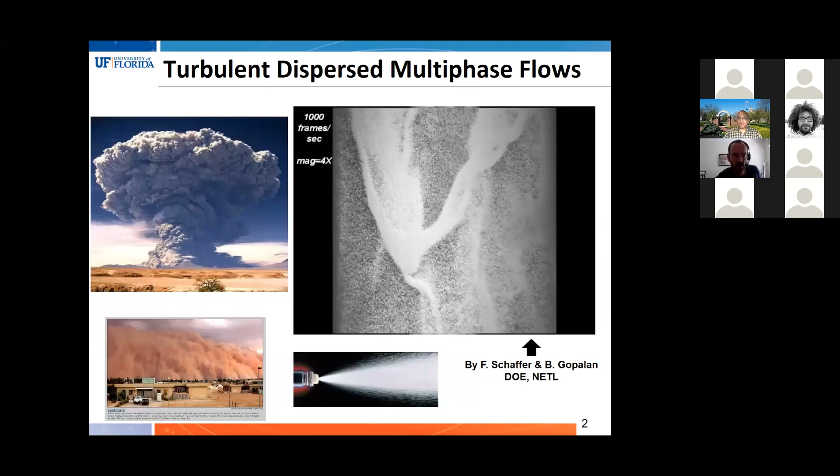First and foremost, in terms of multi-phase flow, which is itself a big area, I'm interested in dispersed multi-phase flow because that's the one I've been working on.

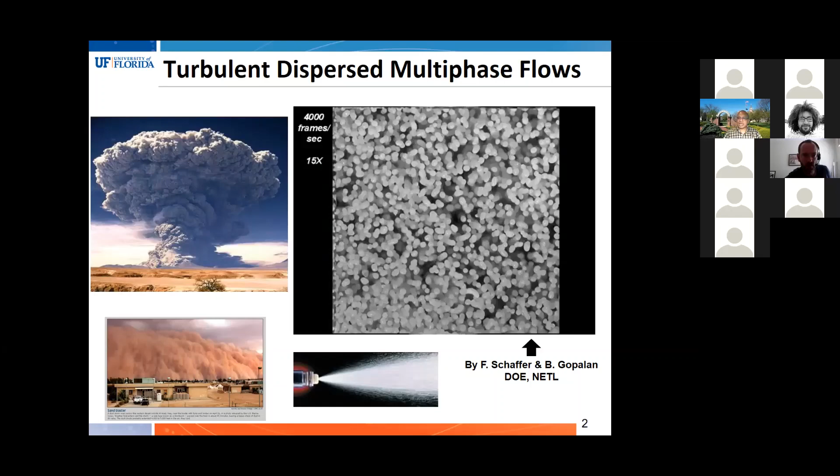This video from NETL is absolutely fabulous because it really gets to the core: you can zoom in and see individual particles, which I call microscale, zoom out and see instabilities, and then go to the full system.

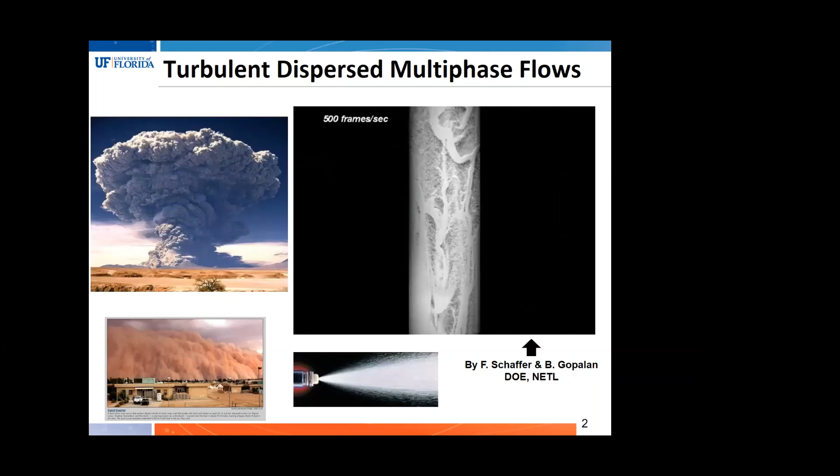On the other hand, the other picture shows some gigantic scales on which multi-phase flow happens. These are the problems that all of us are interested in.

We also know that there are sort of 3 tools people have used. Particle resolved simulations are great because you don't need to make a whole lot of assumptions. I won't say it's completely assumption free—there is some modeling involved, but it's often so well grounded that you can take those governing equations as God-given and compute them.

But the downside, of course, is that it's limited. You can't do a full riser or a full mixing tank with that.

Euler-Lagrange has become a workhorse in certain circles. Again, it involves modeling—mainly that the fluid phase is invariably averaged, because you don't look at the fluid on the scale of the particle; you treat the particles as points. The advantage is you can go up to billions or even tens of billions of particles, track them, and let them collide and do whatnot.

But for a very practical approach—if you want to simulate an entire volcano or sediment migration in a river—you have to resort to some sort of fluid kind of model. Here you average both phases, so more approximations are involved.

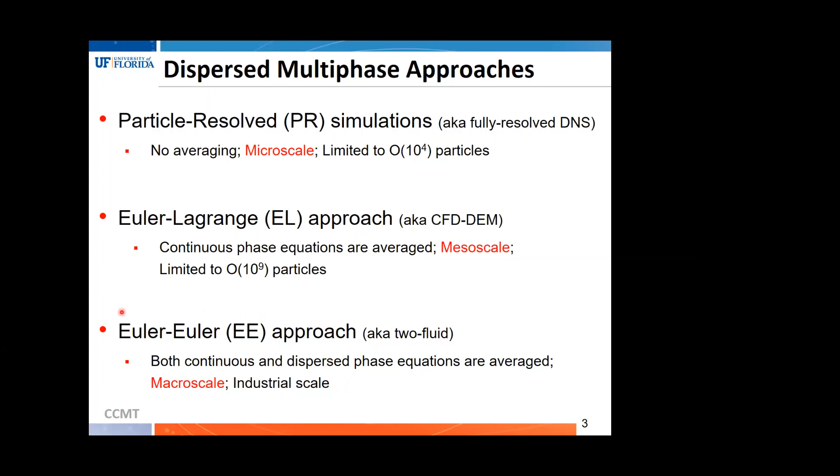The crux of my talk is the science question: yes, we are limited to Euler-Euler simulations of practical systems—how can we make them behave as accurate as particle resolved simulations? How can we upscale modeling information in a systematic way and make use of modern developments to make Euler-Euler as accurate as possible? That's the essential theme.

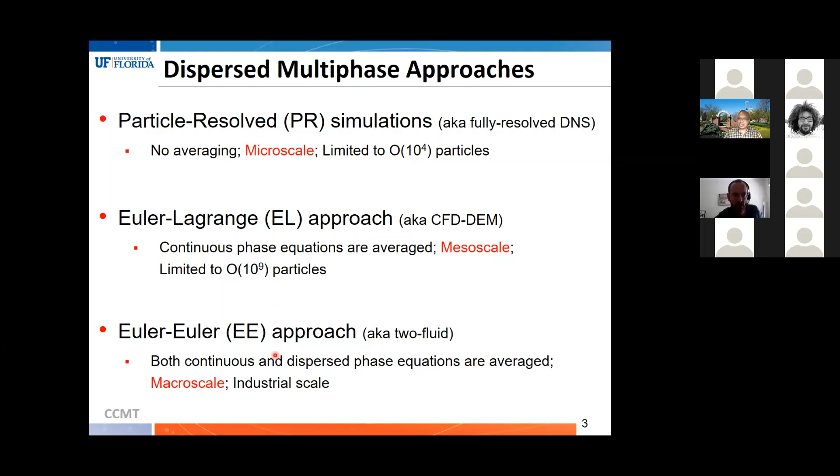This problem shows—say a riverbed looking from top—and all 3 approaches are being deployed here. The very top one is some very early videos from Markus Uhlmann's group.

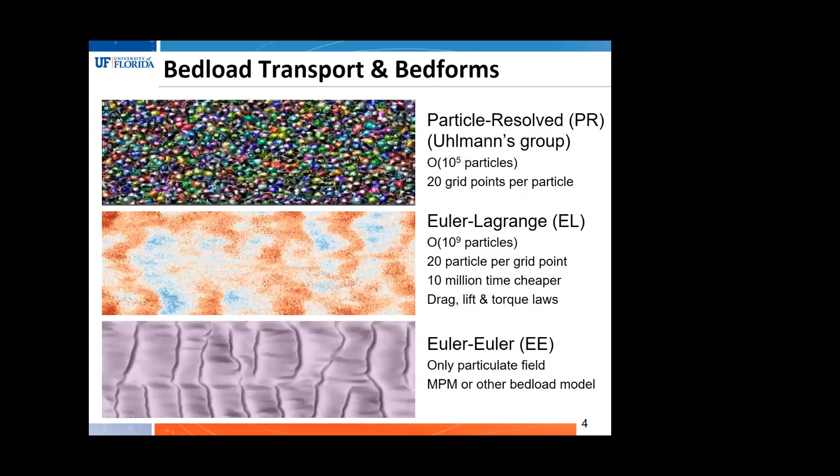He has much better, much bigger systems, but you can get the idea that here you have to put about 20 grid points at least per particle. You can faithfully simulate how the river flow is moving the particle from left to right.

If you go down to the middle frame, you have Euler-Lagrange point particles. You let them collide, and the most important thing is that you can now start looking at instabilities.

But of course, there is modeling involved, and you can see these ripples forming naturally over physical times of the order of, say, seconds. Their distances are of the order of, say, several centimeters, maybe more.

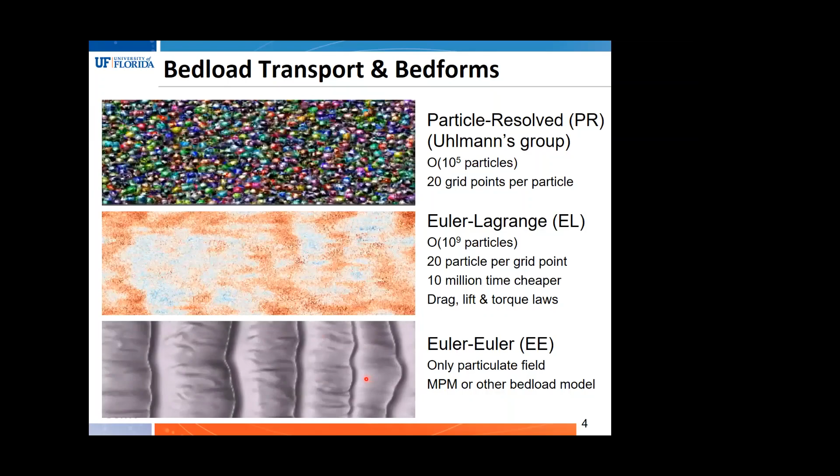At the bottom, the same problem is simulated with Euler-Euler. Of course, you can make the system even bigger, where you can see how the ripples interact.

And that's exactly what we did, ripple interactions we studied. But then you can even coarse grain it and you can see a kilometer scale. Of course, then you will stop seeing ripples, but you may start seeing dunes and things like that.

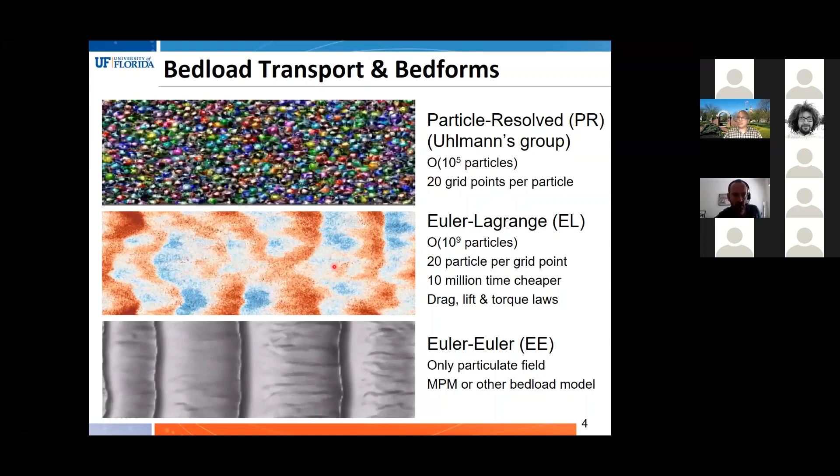So this is the thing. Again, the question is how can this Euler-Euler simulation embed all the wonderful physics that are there at the lower scales? Now, to do that, let me just focus on Euler-Lagrange, and I want to say, how can one make Euler-Lagrange behave like a particle resolved simulation?

Because you're averaging the fluid, you have Reynolds stresses, a closure problem. And in addition, these particles are not resolved, or bubbles or droplets are not resolved. Therefore, you have to come up with drag, lift, torque, heat transfer, mass transfer models.

Today, I want to only focus on drag and lift forces, but the idea permeates, and you can do the same thing for heat and mass transfer. And also, we have done Reynolds stress modeling. So a very systematic upscaling of information.

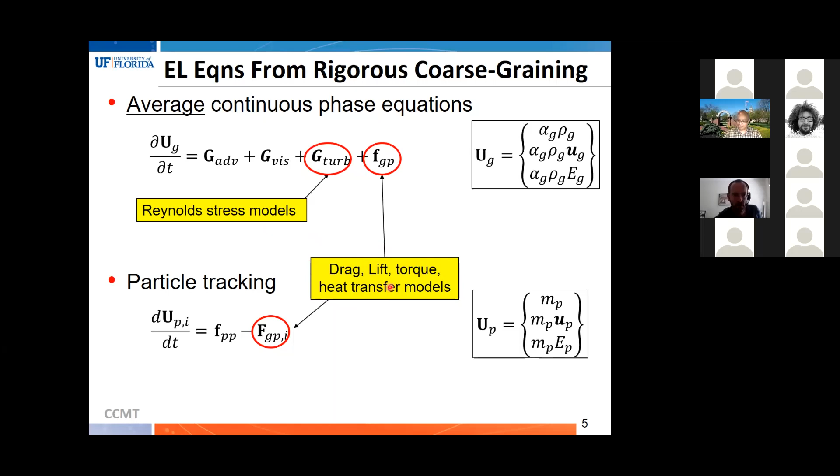Now, we can go to Euler-Euler equations. Then this I is wrong, I'm sorry. So we're not tracking particles anymore. So you have fields of representation for the particulates also.

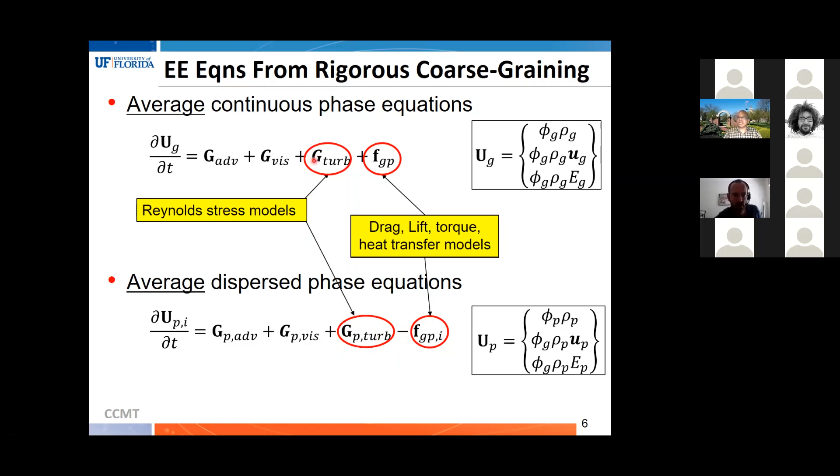So you now have particle phase averaging as well. So you have Reynolds stresses both in the gas phase or fluid phase and the particle phase. And you need to model them.

So I want to make some observation, which I've already mentioned. These Euler-Lagrange and the Euler-Euler, which I will represent as EL and EE, if you use perfect models, they're almost as good as PRDNS. I say almost because you are losing some degrees of freedom.

So there's no free lunch. You can't get them back. But the question is, those modes, those degrees of freedom that you compute can be as good as possible. That is the goal that we have. So we want to approach perfect models.

The other thing is that Euler-Lagrange simulation can be a million times coarser than PRDNS. The numbers are very simple. Instead of having 20 grid points per particle, you can have hundreds of particles within one grid cell. So there is a good bit of saving in each direction, and as a result, your overall saving can in fact be even bigger than a million times.

You can have hundreds of millions of degrees of freedom reduction. That's significant. But the onus, the responsibility, is that subgrid models must be as good as possible. Now, if you go to Euler-Euler, you can have further savings.

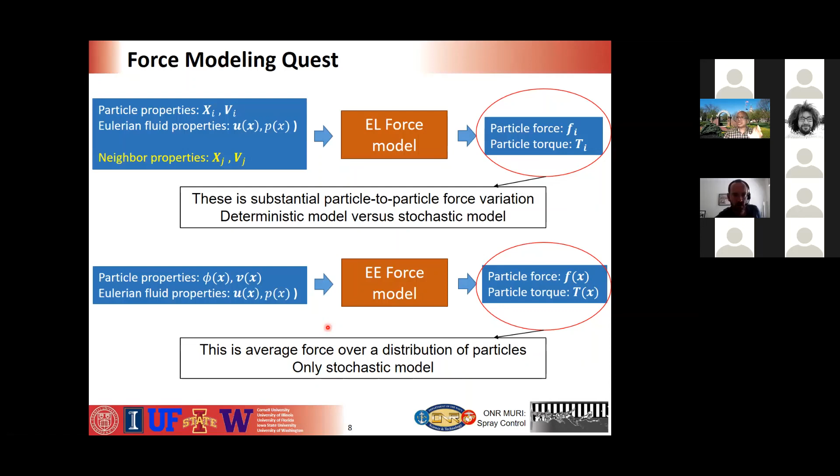Then you can average, you can construct stochastic models out of it. In case of Euler-Euler simulations, you don't know the individual particles, so the models are invariably stochastic in nature. In other words, there will be fluctuations, there will be uncertainties. So a good model is one which not only tries to mimic the particle resolved simulation, but also carries along some uncertainty information.

Those are the requirements. In terms of modeling frameworks, I've thrown at you a number of different things. I've said that we can have deterministic models. One hallmark of a deterministic model is that it accounts for your neighbors. It's a higher class of information where each particle doesn't just ask, what's my surrounding flow, and then give you the drag. It will ask, what's the surrounding flow at the macro scale, but also where are my neighbors? Because I could be in the wake of another neighbor, so I have to adjust my drag. That kind of concept is the deterministic model.

Within that, you can ask one neighbor at a time or n neighbors at a time. It's a truly n-body problem. When you throw a million particles, it's an n-body system. It's a very complicated physics problem, but we're trying to find ways to nibble at it and make advances.

The other thing, and this is one of the key themes I'll talk about in terms of machine learning, is that it's often hard to predict just force directly, because ultimately we want only the force on these particles, but force is kind of hard. In machine learning, people know there may be some latent variables, some inherent hidden variables, that are easier to get first, and then you can go to the final answer you want. It turns out it's better and easier to predict the flow, and then from the flow you can integrate the shear stress around the body, etc., and get the force.

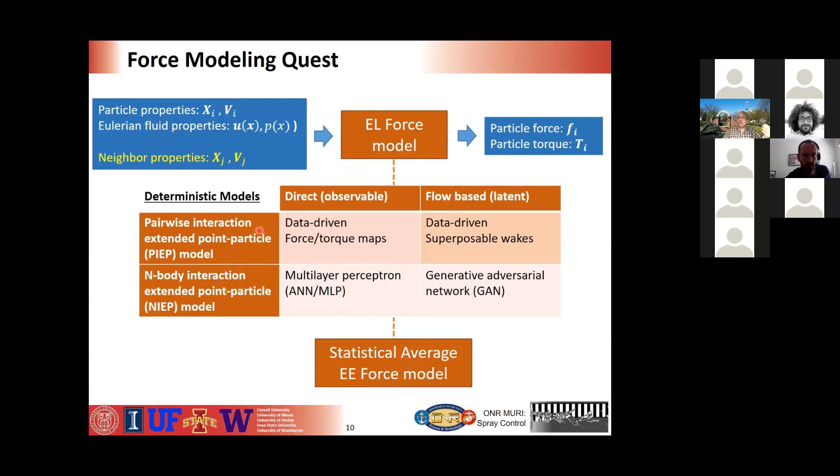From a machine learning perspective, one take-home message is: don't only try to predict the final answer, but think about what is predictable, what you can train easily. Once you have the deterministic models, again, this is not the end in itself. For practical things you may need a statistical model, but to get the statistics accurately, you may want a way station of a deterministic model, which will give you DNS-like data for billions of particles. Then you can average it to create the appropriate statistical models.

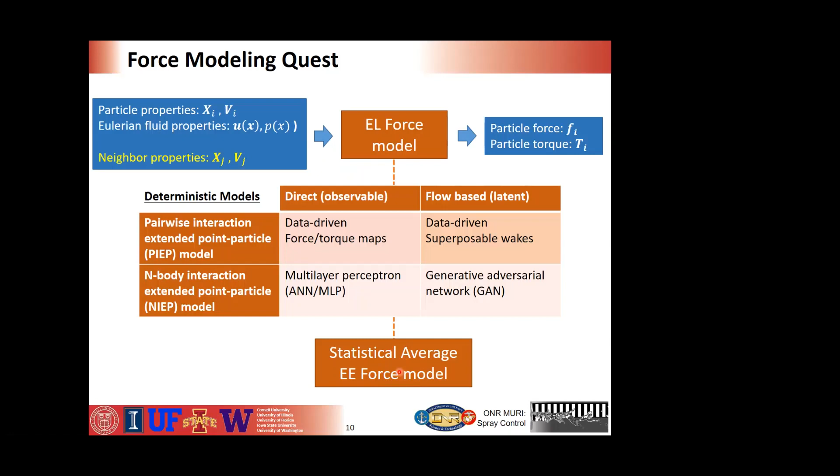All right, so that's the lengthy introduction. What am I going to do in the rest of the talk? First, I want to talk about neighbors mattering, the random nature of particles. What makes multiphase flow exciting is that it's stochastic in nature, mainly because of turbulence, but also because the particles are random. There is a randomness associated with it.

Then I'm going to talk about flow prediction, which is, as I said, a latent variable that can be used to do the force prediction. I'll talk about pairwise approximation first, then the real deep learning we've been using for n-body prediction. In all these things, the training data must come from PRDNS. We use machine learning and multiphase flow understanding to come up with a machine learning model. Once we have a Euler-Lagrange model that behaves as good as PRDNS, particle-resolved results will be replaced by Euler-Lagrange as training data. You repeat the process and get an outstanding Euler-Euler model. That's the bootstrapping strategy we're going to pursue.

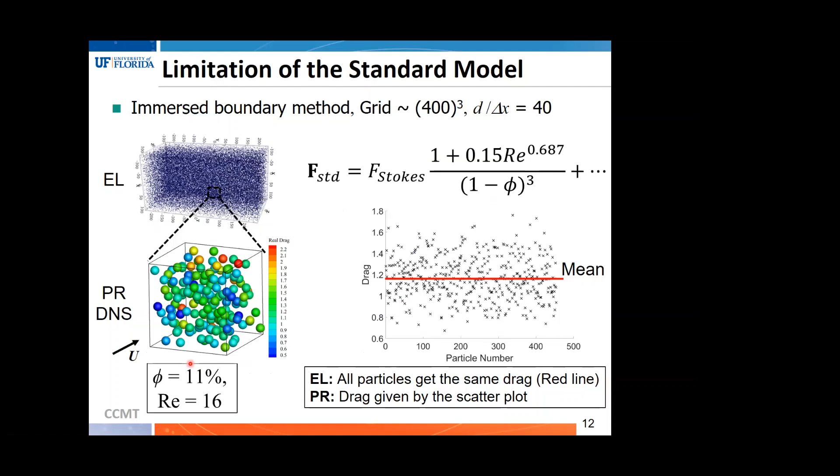So let me get to the first point, which is neighbors play a big role. Here is an Euler-Lagrange simulation. Let's say a big tank, and let's say the particles are going from left to right.

Let's say this is one big cell, a finite volume cell, and that this cell has hundreds of particles with a random distribution, with an average volume fraction of 11% and a Reynolds number of about 16. Now, if you ask, do we have a good model to calculate the average drag for all these particles, given 11% volume fraction and average Reynolds number of 16? The answer is yes. There are at least 10 correlations and a number of other really good correlations that are functions of Reynolds number and volume fraction, and you can find the average drag.

You ask, what's the force on these particles? Some of them are very large, given in red, and some are very low, as you can see here. Some could be half the average value, some could be twice the average value. Why so? There's a big scatter, and the question is, if we want a DNS-like Euler-Lagrange approach, you better capture some aspects of the scatter. You just can't be satisfied with the red line. That's the key. How do we systematically build a machinery that is not just stochastic, but even deterministic, so that it can come as close to this as possible?

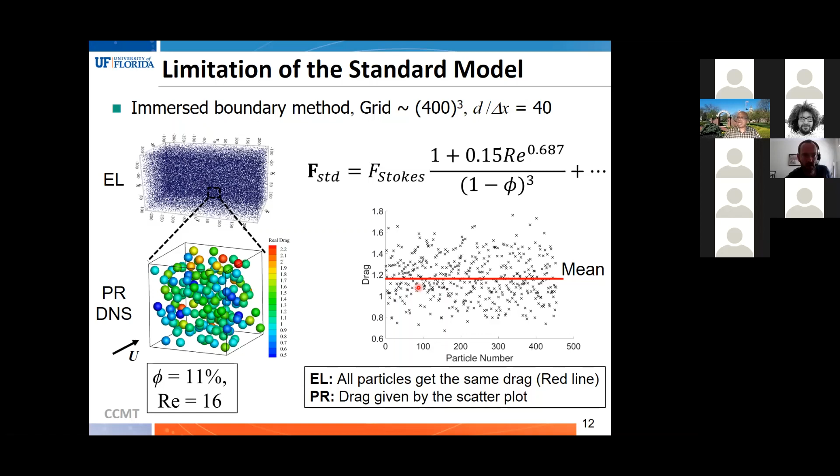So that's the question. Before that, why do some particles have higher drag and others lower? It's pretty easy. In this particular scenario, I'm zooming in on two particles named A and B. The flow in this case is coming into the board. It's quite obvious that A is going to have low drag because it's being shielded by two guys upstream, whereas the two guys upstream of B are a little bit too off, so they're channeling the flow. So B's drag is 80% more, versus A's drag is 50% less.

So if you look at the scattering, the prediction of why the drag is high and low is nothing but easy. You cannot ascribe it to a local volume fraction. It very much depends on the anisotropic distribution of neighbors. Neighbors are important. And interestingly, they also follow this scatter of data, both the drag force and also their side force. Even though the flow is into the board, each particle is going to feel substantial side forces. So these are sort of Gaussian-like distributions.

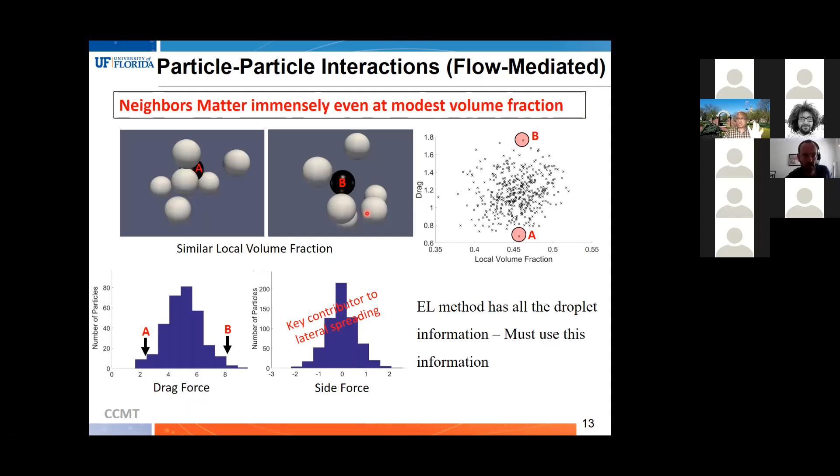So Jesse and others are working on a stochastic model, which is a very good approach, but the data must come from these kinds of simulations as to what's the level of dispersion. But one effect of a stochastic model is that if you assign randomly forces to these particles, you may give B a very low drag, and you may end up giving A a very high drag. That's a risk in a stochastic model. So a deterministic model will try to preserve results as close to DNS as possible, but of course it's expensive and may not be scalable. But the question is, can we use a deterministic model to even train and obtain more robust stochastic models?

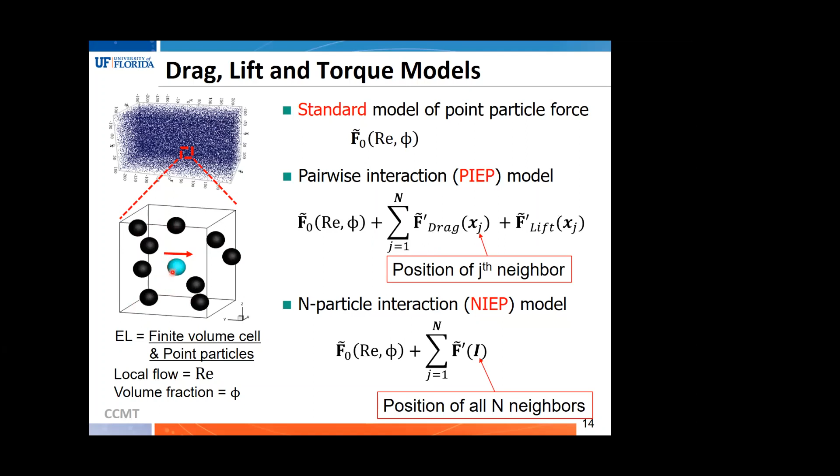So again, the point is that what we have been doing is the best available model: if you take a volume, in this case only 10 particles, you can find what the drag is based on local volume fraction and Reynolds number. But how do we go to the next step? How do we assign an improved model for the cyan colored particle? You've got to account for every neighbor and take that into account in modifying the drag of this particle.

So it's sort of like molecular dynamics. There's a hydrodynamic force due to average flow, but can we also build in neighbors' influence? That's a very simple thought. And if you're going to do molecular dynamics, why can't we do this one neighbor at a time? But that's not how hydrodynamics is. Hydrodynamics is, of course, nonlinear, and it must be treated as an n-body problem. So what we said is, first, let's do an approximation and do a pairwise interaction, where every neighbor's influence will be measured in terms of a change in the drag and lift force of the particle.

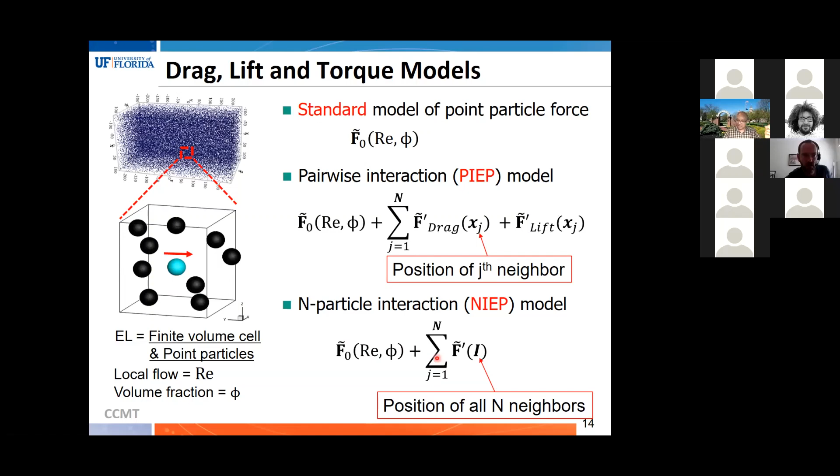I will talk about how to build these neighbor influence maps. But if we want to take all the neighbors into account simultaneously, then we need to go for some machine learning. That's the idea I will cover in the last 5, 6, maybe 10 slides of my talk.

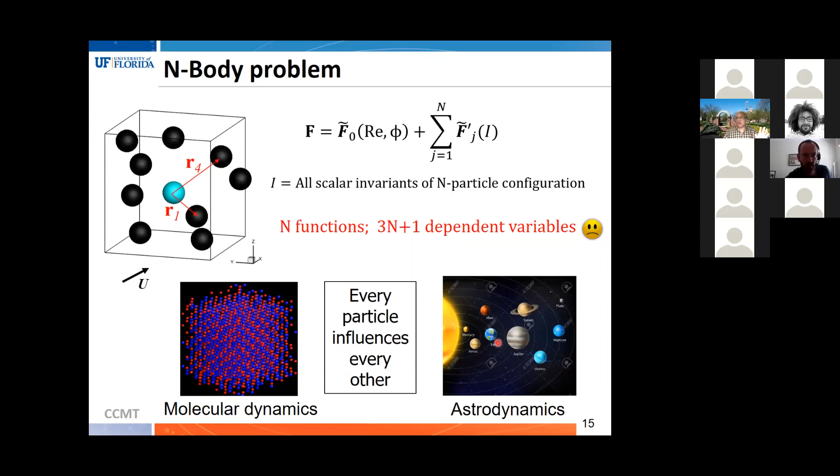Again, very simple, this idea of pairwise interaction is nothing new. Statistical physics has been doing it for centuries, so we want to borrow a lot of ideas from statistical physics. It's already being done in molecular dynamics, neighbor at a time, in astrodynamics, pair interaction, etc. We want to do the same, understanding that it's only an approximation in our hydrodynamics problem, which is very complicated, unfortunately.

So the idea is we want to create these pair interaction maps. Pair interaction maps implicitly depend on 4 variables. If you have a particle influencing all the neighbors around it, that influence depends on the flow. This particle has a flow coming from left to right, so the influence is inherently axisymmetric, and the neighbor's position is measured in radial and angular distance. The 2 other parameters are the Reynolds number of the local flow and the volume fraction.

If I create these maps, then I can account for every neighbor's influence. So the force on any particle will be the mean force times its drag, plus the influence of all the neighbors. A very simple idea.

How do you create these maps is the detailed question, done with a very simple machine learning technique. We take a lot of DNS data. This picture is the same idea we use for machine learning in the n-body problem too, but I'll do pairwise interaction first to understand how to construct the flow. Once I construct the flow, I can predict the force.

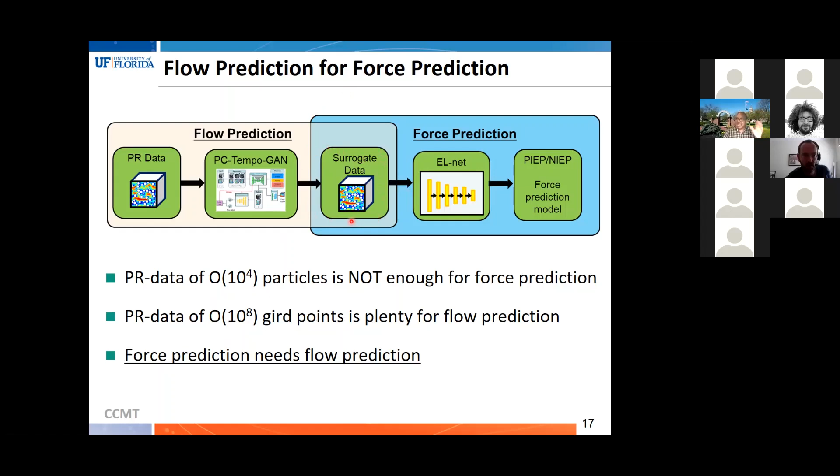Once I have the flow, I can calculate shear stress and pressure distribution, and from that calculate the force. So this two-step process, flow is a latent state in machine learning terms, used to reach the final goal. Flow prediction is very important.

So how do I do this from the PIEP model perspective? I won't get into details, just a high-level concept. We take PR-DNS data at different volume fractions and Reynolds numbers, and ask a simple question: does there exist an axisymmetric wake for every particle at this Reynolds number and volume fraction? If I take that wake and patch it onto all these particles and sum it up, it should recreate the particle resolved DNS data accurately.

Find that flow - that's exactly what machine learning does. It finds what we call a superposable wake: the wake of an individual particle at a finite Reynolds number and finite volume fraction, that when superposed for all particles will look like the DNS data as closely as possible. So that superposition is given here. Of course there's an approximation, it's not treated as an n-body problem. In an n-body problem we ask the same question: I have all these n particles, find the best flow that approximates the DNS data. But in a pairwise approximation, we use this superposable wake approximation.

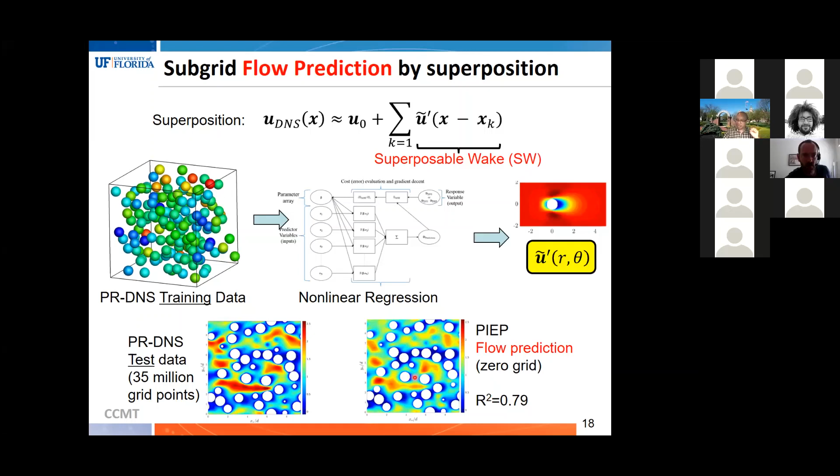This is basically creating subgrid information, knowing only the particle position and the mean flow, filling in all the details without doing simulation. So this is exactly what I set out for, and we are able to do it at about 80% accuracy.

I first want to tell you that there is a lot of physics out there. This data wasn't available right there, so you can't get this by just statistical simple averages. You need a little bit of an inverse problem to get it—okay, you can call it machine learning or you can call it regression. Somehow something has to be done to get these things.

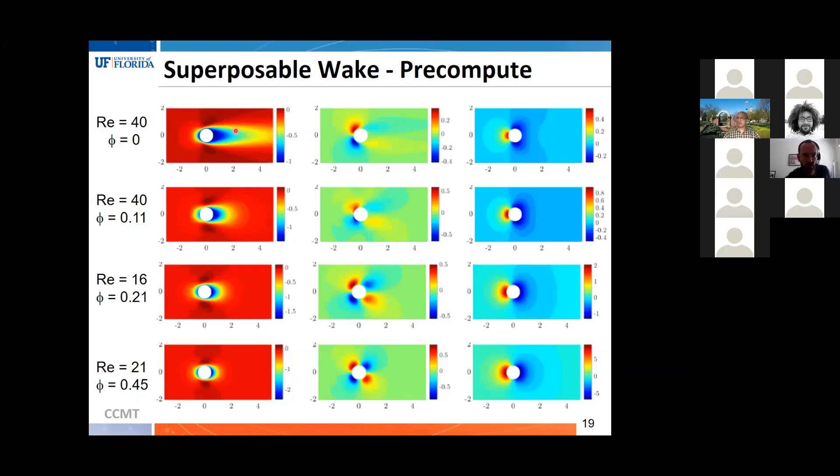Now, when you think about it, this physics is very interesting and becomes sort of obvious—the wakes get simpler when you have many more particles, okay? So machine learning has a lot of physics to give as well.

Another very interesting thing is this concept: so if I'm showing you flow prediction, then how do we go to force prediction? Well, we have a very simple theorem, a Maxey-Riley kind of equation. So to calculate the force on, say, the ith particle, what do I need? I need the undisturbed flow at the particle. What's the undisturbed flow? Well, pretend that this particle doesn't exist.

What would be the flow due to everybody else? Now, if you want to just get at it using particle-resolved simulation, it's impossible, because to know the undisturbed flow of this particle, you'd have to do a DNS without that particle. To know the undisturbed flow of another particle, you'd have to repeat another DNS without that particle. But with the superposable wake, I can just superpose without this particle and get the undisturbed flow quite easily.

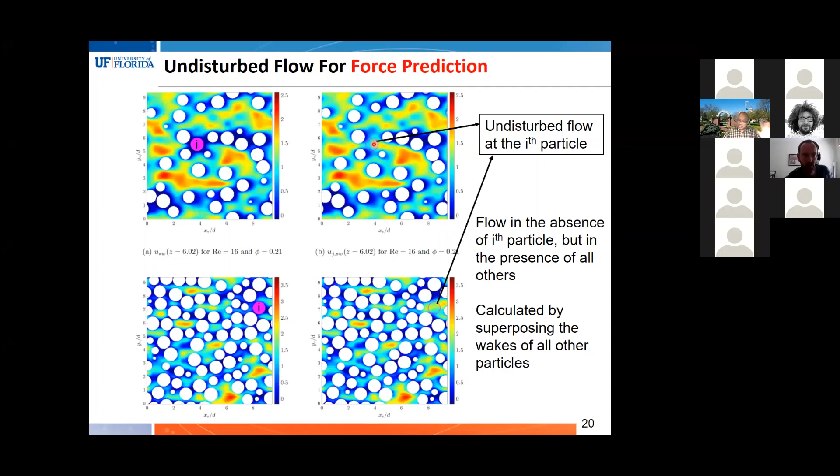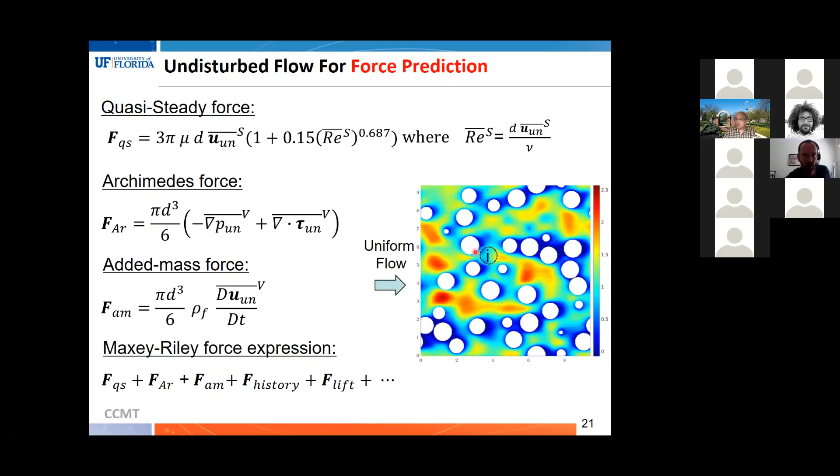So in other words, conceptually, the superposable wake is a cool idea—it's able to get the undisturbed flow of any particle. And once I know the undisturbed flow of any particle, doing a surface average of this undisturbed flow and volume averages of pressure and velocity—there's a lot of detail in there I don't want to get into—the important thing is that if you know the undisturbed flow, you can get the quasi-steady force, Archimedes force, or pressure gradient force. Every force on this particle can be precisely obtained from that undisturbed flow.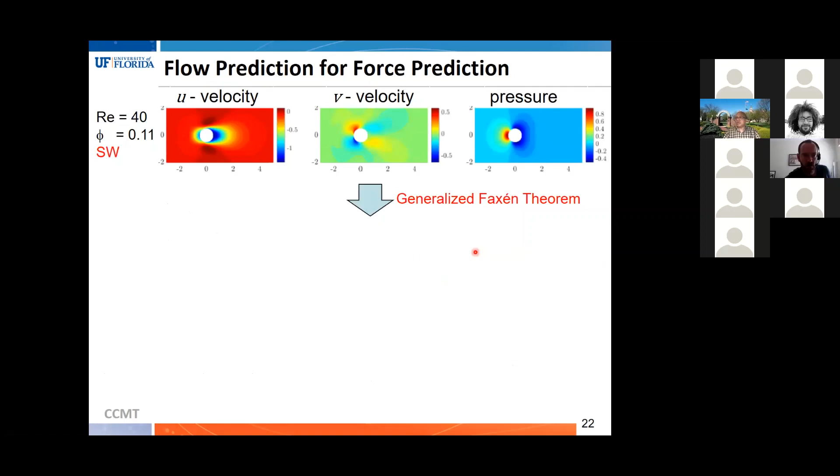And this is how we get from flow to force, very grounded in solid theory. Okay, so what we do is we don't do it the way I said—we calculate each neighbor's influence as a force, calculated as a drag map, lift map, and a torque map.

What this is: if I have a black colored particle, what does this black particle do to another particle somewhere around it? The second particle, obviously of the same size, its center cannot be within this white region, so I don't need that information. The center of the second particle can only be outside, anywhere outside. Suppose it's here—I can read off from this map and say, yeah, this black colored particle is going to create a negative drag on this second particle. It's going to create not so much of a lift force, maybe a little bit of torque.

So in other words, neighbor's influence has been encoded as very simple maps. These maps are functions of R and theta—they are axisymmetric, and they are functions of Reynolds number and volume fraction.

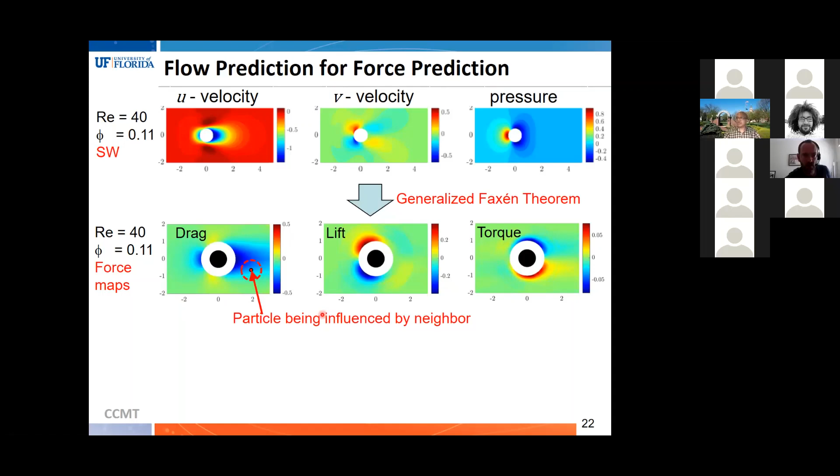I create these maps, store them, and consult them in Euler-Lagrange, and keep moving the particle. So the idea is very simple—from flow prediction we can go to force prediction, and then use it for moving particles.

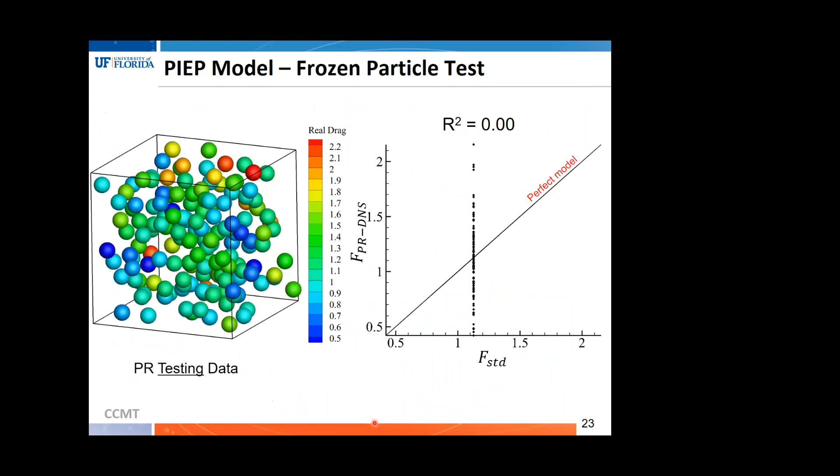What does it do? So here I am showing simple particle-resolved DNS data for a few hundred particles. This is now testing data—I have not used it to create the model, so the test data is different from the training data. And that DNS data of drag is plotted.

Different particles have different forces. This is the best current model. It does a great job predicting the average, but it's unable to predict particle-to-particle variation in drag. So all the particles get the same average force. That's what current finite difference, Euler-Lagrange and Euler-Euler methods do. My preaching is that we can and should do something better.

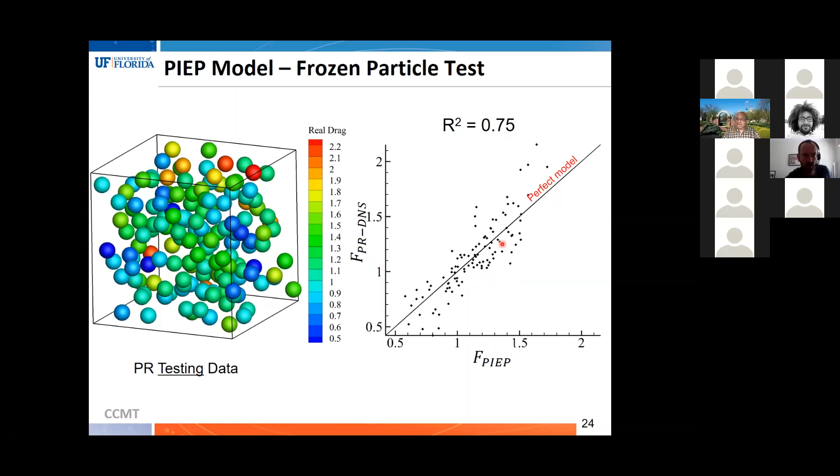Of course, the perfect model would be the 45-degree line. If you have a model that does as good as this solid line, your Euler-Lagrange is perfect. That's exactly what I was talking about. Our PIEP model doesn't do a perfect job, but you can see it's up to 75% accurate, which is pretty good. And for the lateral force also, we can predict it with great authority.

Now let me show a couple of old slides, about 3, 4, 5 years old. I've shown them many times, but for the benefit of students who haven't seen it, let me show it. Here's the very simplest example.

Two particles falling down. Here is the DNS, very easy to do. Here is the classical model: no DNS, just the two particles moving, but each particle doesn't know the other exists. And they obviously will fall together.

Now this is the PIEP model. No DNS. Each particle understands the wake of the neighbor, consults the force map for drag, lift, and torque, and they move and rotate according to those drives. You can see the drafting, kissing, and tumbling is fairly well captured.

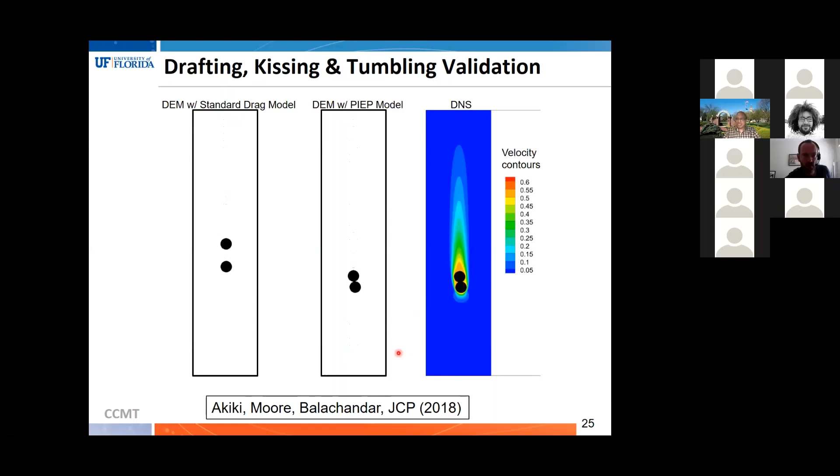In the interest of time, let me show you how we can easily go from 2 to 80 particles. DNS might take 10 hours on 32 cores. Here it takes seconds, or in a MATLAB code, you just track position, velocity, even rotational velocity of these particles, and you track them.

Clearly, this problem is chaotic. Therefore, the exact locations are not the same, but the statistics extracted from the PIEP model, without any CFD, do a great job. So the idea is that now we have a model that brings in subgrid information in a reasonable way.

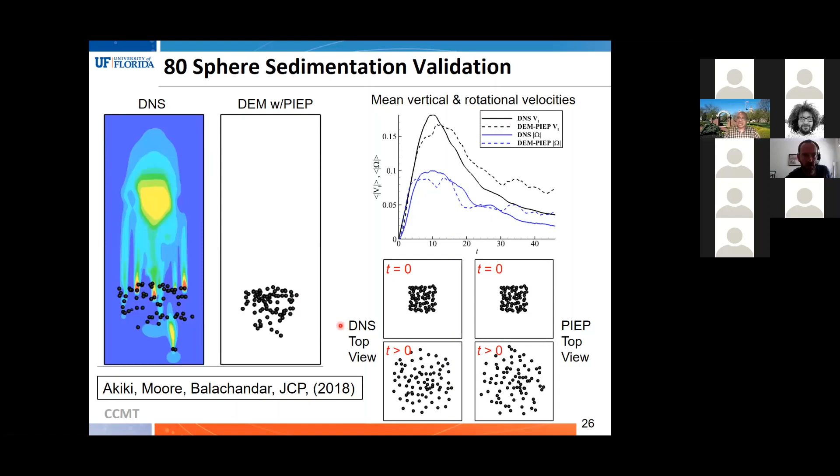Here is a scaling up to 1 million particles. This is the same system I showed at the very first slide. These particles are falling down, settling down. This is an Euler-Lagrange simulation involving 3.5 million grid points and about 2.5 million particles. This is what the actual flow looks like.

The Euler-Lagrange simulation is average; it doesn't capture the wake of every particle. But these particles are moved according to the PIEP model. In other words, every particle in the simulation knows where the neighbors are and uses that information to create the perturbation introduced by the neighbor.

Therefore, if I were to ask what would have been the locally resolved flow, it would look like this. This is not the flow we compute, because we cannot compute it—it would require 226 billion grid points. But the particle motion in this flow is as good as if we had done a simulation at that resolution. The fact that this flow doesn't have this detail is a loss of information you cannot easily recover. But the point is that the subgrid information is incorporated in this simulation.

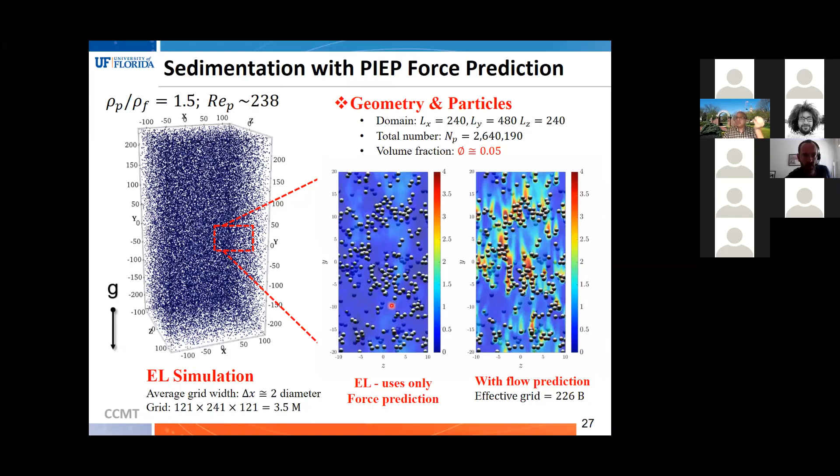Now we have measured collision rates and lots of things with this. You can say this Euler-Lagrange simulation is as close to what a PRDNS would require, say hundreds of billions of grid points. Now I can use this information to construct models, even models for Euler-Euler, and that's the plan we have been pursuing. That's exactly what I've done.

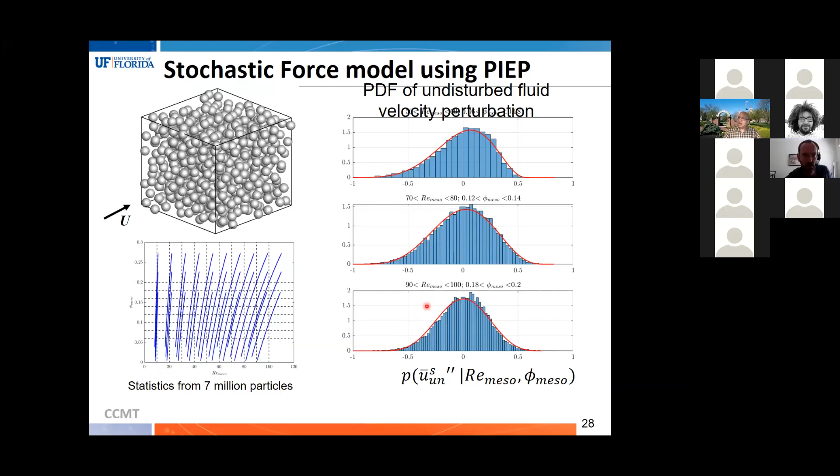So what we have done is use these models, constructed with PIEP models, to create Euler-Euler models. I don't have time, and I don't need to go into that—I'm going to quickly move on. The main point is that if we build an Euler-Lagrange model we can have better faith in, we can use that to bootstrap and create drag forces for varying Reynolds number, varying volume fraction, varying particle motions, etc., and create models that can be used in Euler-Euler simulation.

So I'm going to skip this slide and quickly recap this PIEP approach: we first did flow prediction, and we used the flow prediction for force prediction.

And we are able to do now Euler-Lagrange simulations with improved prediction, which behaves closer to fully resolved simulation and can be used to generate a lot of data for statistics. Okay, that's a sort of a summary.

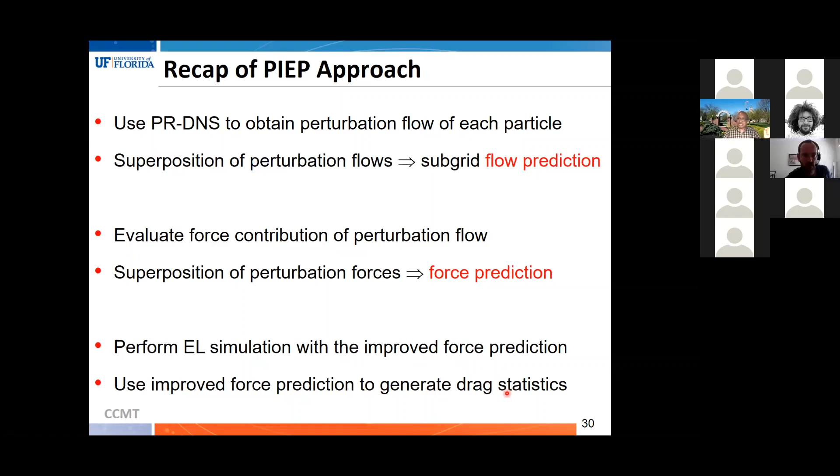Now I want to take another 5 minutes to tell you how we go and do the n-body problem. The training data for me is that I data mine. I take my PRDNS, put a box around every particle, and show the deep learning what the flow is around this particle and where the neighbors are. I show a box of, say, 5 diameters by 5 diameters by 5 diameters. So if I have 10,000 particles, I have 10,000 little boxes of information that I use for training.

And the idea that we are going to use is called generative adversarial network. Why? This has revolutionized many different fields, including cosmology.

One thing is that, for example, if you show an outline of a bag and give many training data, it can fill in and tell you what the bag looks like. You give an outline of any kind, a road, it fills in the data. So our idea is very simple: I'm just going to tell you where the particle neighbors are, and you fill in and draw the picture for me, getting this kind of flow. Think of it like filling in this picture, like a Van Gogh, and draw for me this flow, and I want to measure how good it is.

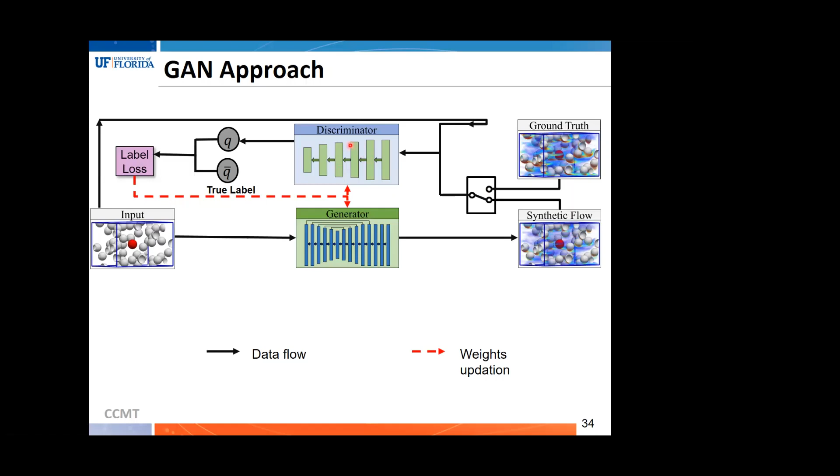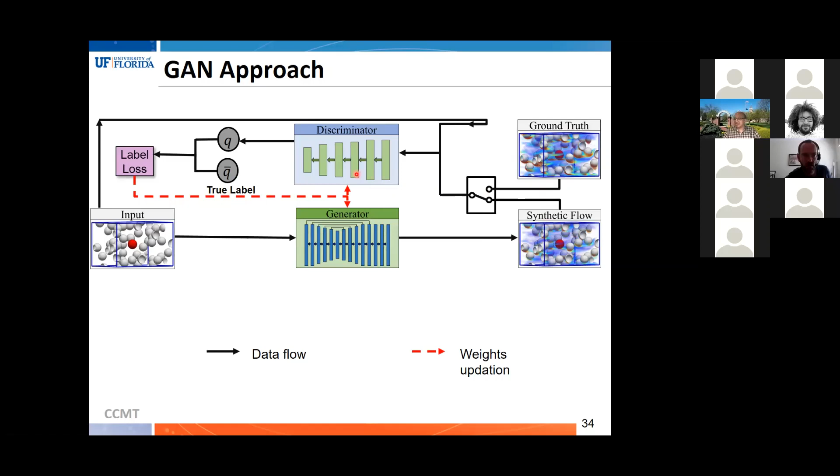The discriminator initially is very good. It will easily tell the synthetic flow is flawed, and the generator will try to get better and better, and they reach an equilibrium. Eventually the generator gets so good it creates flows that will fool the discriminator. Okay, that's a very simple idea.

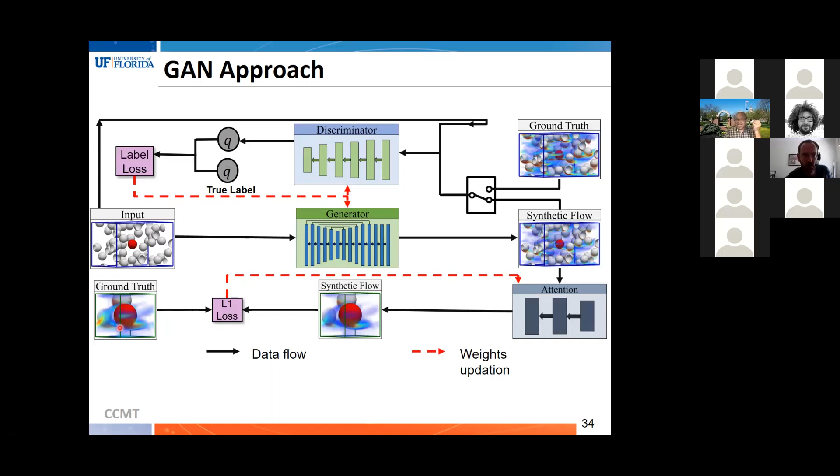And then once you have this flow within a 5 by 5 by 5 box, we can use another network to improve, because for the force on this red particle, I don't need the big flow, I just need a flow in the immediate neighborhood. So there's something called an attention mechanism which can be used to really fine-tune and get high resolution data around this particle. Okay, so that's what we do.

And I already told you that we use symmetries. We have worked a lot on how to build physics into this machine learning process: conservation of mass, no slip condition. These are details. I'm more than happy to talk with anyone who is interested.

In the last few slides, I want to get to the final results. So here is the particle resolved data. This is just a volume rendering of, say, velocity. Here is the NIEP prediction of the flow in this little volume. This particular case has a volume fraction of 21%, and Reynolds number is about 16.5.

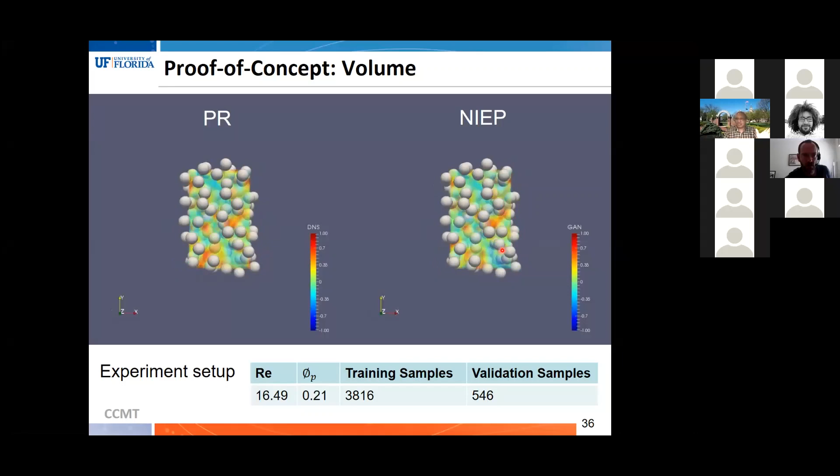We used about 3,800 centered particles and the volume around it, and we used a validation set of 546, and then we did training and testing on several hundred samples, and they are distinctly different. So nobody can blame us that we use the same data for training and testing.

So this is the strategy, and here's a picture. This is the actual flow—took hundreds of hours on a 500 processor system. This is the GAN prediction. You can look at it—the error is really very small. So the training is able to predict it really well.

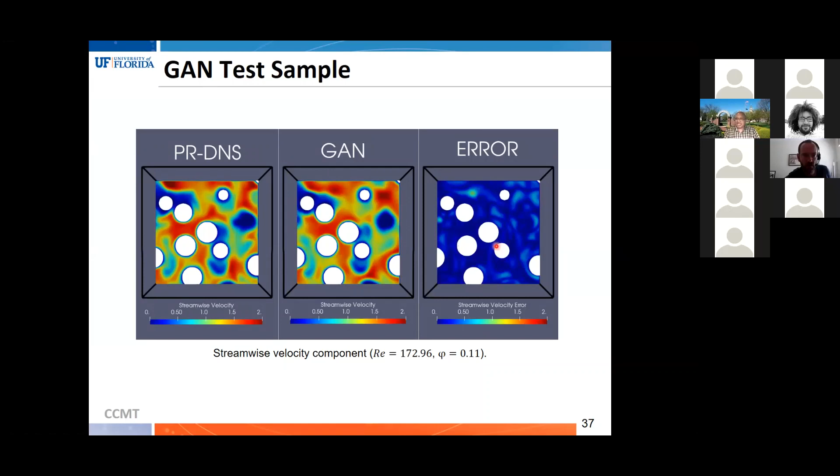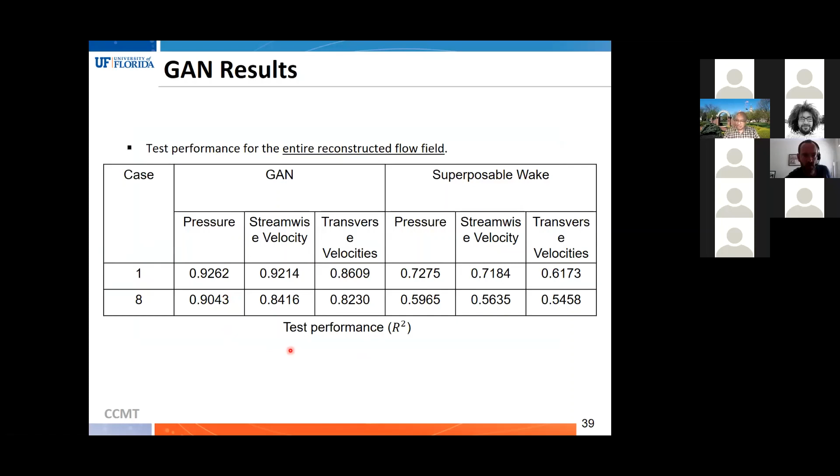We have done it on 512 nodes, then it obviously takes much fewer hours. In terms of GAN, training takes about 24 hours on 4 GPUs. But once you train, I can generate the same synthetic data in half a second.

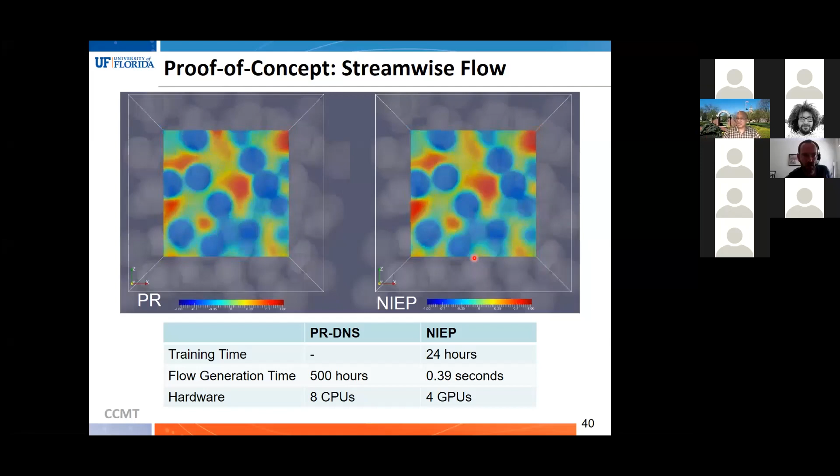That's why I'm saying once we train it, I can repeat boxes, tens of thousands of boxes, or even million boxes, and I have plenty of data for averaging. And this is the strategy. This is how the Euler-Euler models that I skipped over were generated.

How good is it, how accurate is it? In this particular case, the R-squared value of the n-body problem: the PIEP model, the pairwise interaction itself was good, able to get about 80%. Now, the n-body GAN, with attention, we're able to get 97% accuracy.

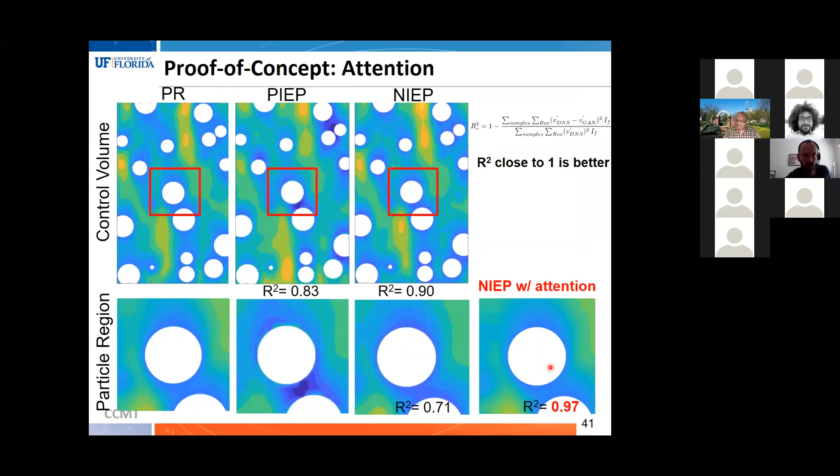I want to say a few words in summary, then open for questions. The main message I want to say is that we are on a threshold of some revolution. We can revolutionize the modeling of Euler-Lagrange and Euler-Euler by incorporating more information from many experiments and simulations. We have not really been using the full potential of our DNS, and we have an opportunity to upscale.

Ours is just one method. There are many other methods. Machine and deep learning have built such incredible machinery, which we can embrace and benefit from. What we have been doing is extending these deep learning approaches to other related problems, trying to do more along the lines of what we've been doing.

Now, let me stop there, Omar. I can take questions if people have them. I'm sorry, it's a bit of a rush.

No, it was really great. Thanks very much, Bala. Fantastic. Let me start with a couple of questions because I don't see any in the chat, but certainly people can come in. Yeah, obviously, I think what you presented is really quite rational. It looks really quite powerful.

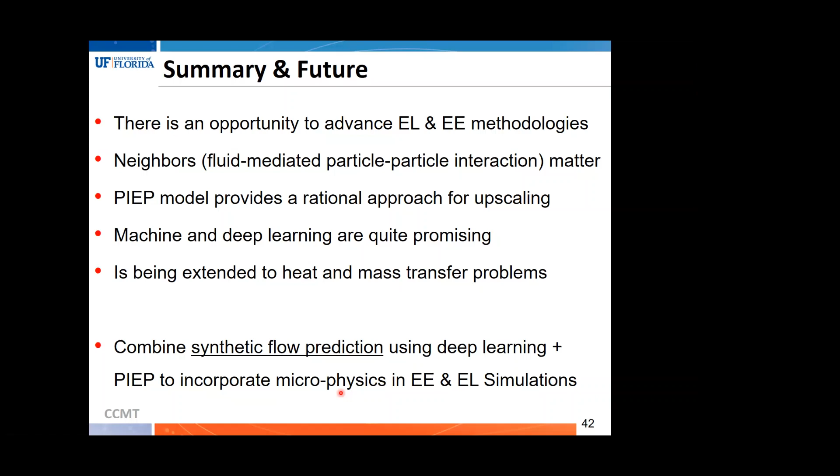One thing I was wondering about is the nature of the particles. Obviously these are non-deformable particles. So the natural question arises: what happens if these particles are deformable, where they can undergo coalescence, breakup? What if the flow surrounding these particles is quite complex in itself? Tell us a little bit about how extensible this methodology is to deformable particles.

Omar, great question. I am selling not just what we have done in the case of rigid stationary particles. By the way, the training is for stationary, but we can apply this, and we have tested this, as I showed, for moving particles. But the approach and the framework is: how do we do droplet or deforming particle resolved simulations? And you get a lot of data.

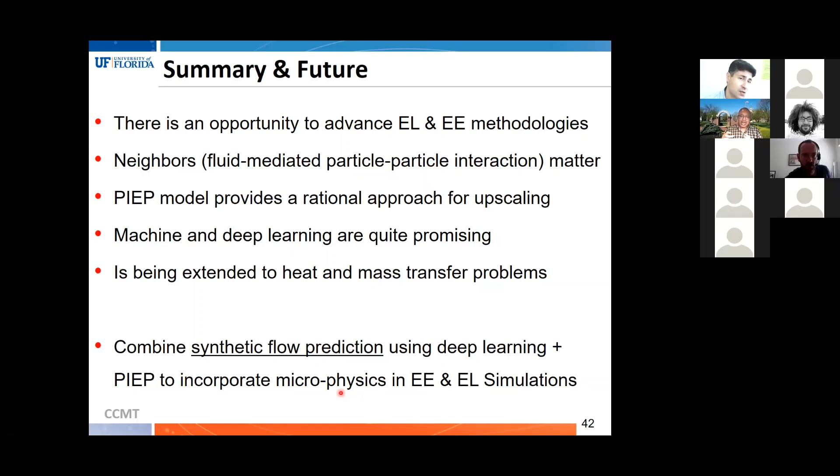I cannot see why one cannot do this for a deformable particle if you provide the right kind of information. In other words, you must be able to predict to a certain level of accuracy how a droplet will deform at the next instant—put deformation as one of the predictive outcomes of the problem.

One of the things I did not mention is that a good understanding of physics is of absolute essence in constructing meaningful models that are robust and not just overfitting, curve-fitting exercises. But I think there is a greater opportunity.

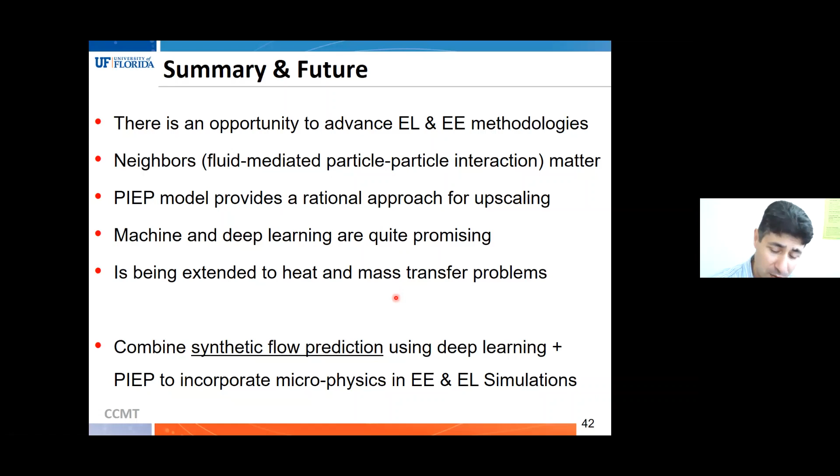Yeah, absolutely. I guess I was just thinking that at some point, if these particles are deformable, then their numbers could change because of coalescence or breakup or whatever. But it sounds like it is potentially possible to try to get that kind of subgrid scale information. It may be a bit more complicated than just communication through wakes, though, right?

So you put this into a machinery, given your droplets' positions. You have a bunch of droplet positions, and you want to know what happens to them a little time later. You have the option of either doing fully resolved simulations to get the ground truth, or experiments for the ground truth. Then you say, I don't have the luxury of resolution, but is there a machinery that, by looking at these droplets' current position and maybe past history, can tell me what the microscale physics should be. Then you use the same machinery to break them, coalesce them, do whatever you want. That microscale missing information must be predicted in some efficient way by the system. Yeah, sure, okay, so that's the idea.

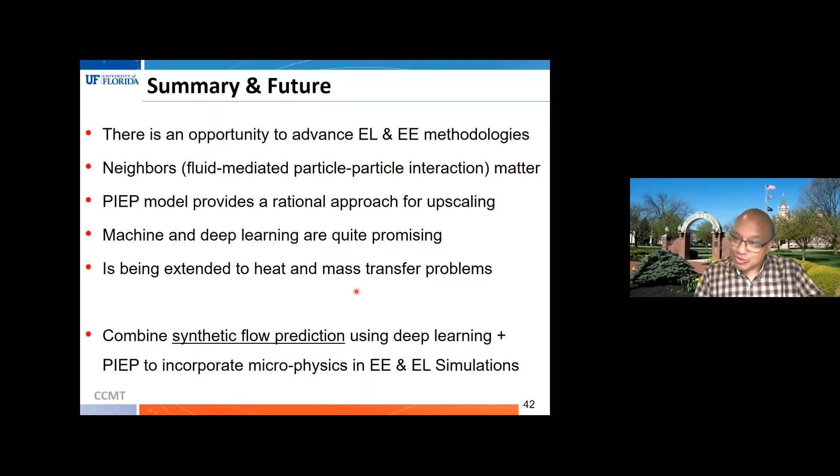You know, the PIEP model or the NIEP model, when you look at it, what is the N-body GAN trying to do ultimately? It takes in static data, and what we're trying to ultimately predict is the force on a particle, which has, let's say, a dozen neighbors. So what goes into the training is the location, the relative location of the dozen neighbors, maybe the velocity, the rotational velocity, maybe the acceleration of the dozen neighbors. So we're talking position, translational velocity, translational acceleration, rotational velocity, rotational acceleration. For the dozen neighbors, you have vectorial quantities, so there you have 60 pieces of information, along with Reynolds number of the flow and volume fraction. You can see there's already an incredible curse of dimensionality at work, and we are asking the neural network to take this 60-dimensional space and find the solution. And that's what it does. Now, what prevents you from adding my neighbor's shape and how the shape is changing?

You don't even have to parameterize. If you use a GAN, your neighbor is looking like an ellipsoid, you just send that information. So I don't see any stoppage. This is precisely where neural networks have really championed, because this is not a problem where you can say I want to build a 60-dimensional model.

So on the other hand, it's all a statistical process. It does a reasonably good job extracting those patterns that we are unable to extract ourselves in a naive way. Okay, thanks a lot for that.

That's great, maybe we take one more question. There's a good question here from Rashid about the coupling between the particles and the flow in situations like cavitation, where you can have a strong coupling back from the particles onto the flow. So what happens in situations like this?